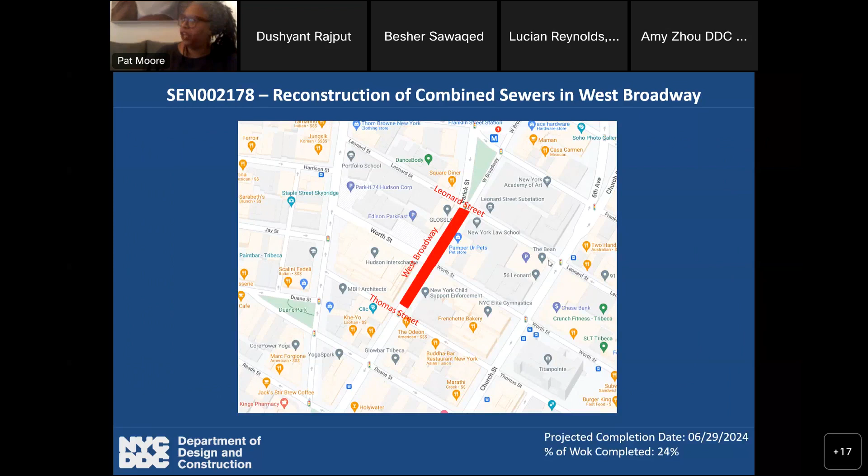So we'll hear from you, it's fine. You can wait till, what is this, February, March, April, you'll be back. So by April, you'll be up and running.

Pat, this is Dushyant, let me give you a little bit of update on the sheeting. I believe it should be approved probably by next week, and once it's approved, the contractor will resume the activities.

Okay, good, okay no problem. And this on the screen is showing the 12-inch water main replacement work we did before the contractor took their holiday vacation back in December. This is for the east side of West Broadway between Worth Street and Leonard Street. They put in a new 12-inch water main.

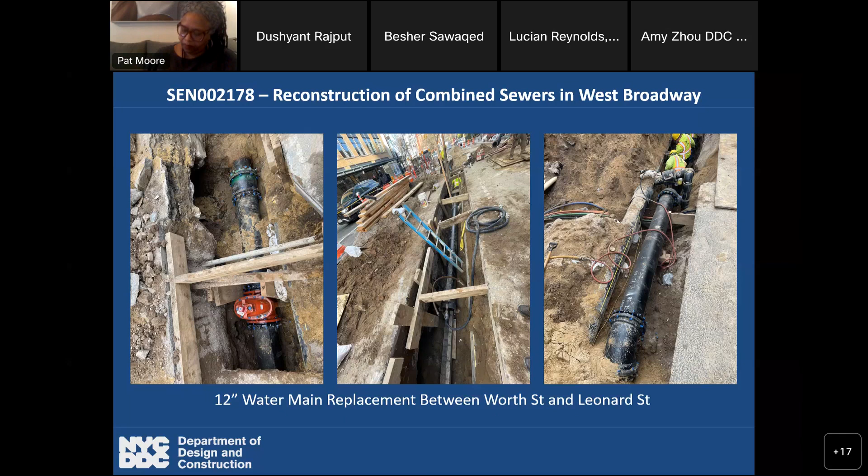It was between Worth and Leonard Street, on the east side of West Broadway. They also installed new fire hydrants between Worth Street and Leonard Street after finishing the water main replacement. This was all done before January.

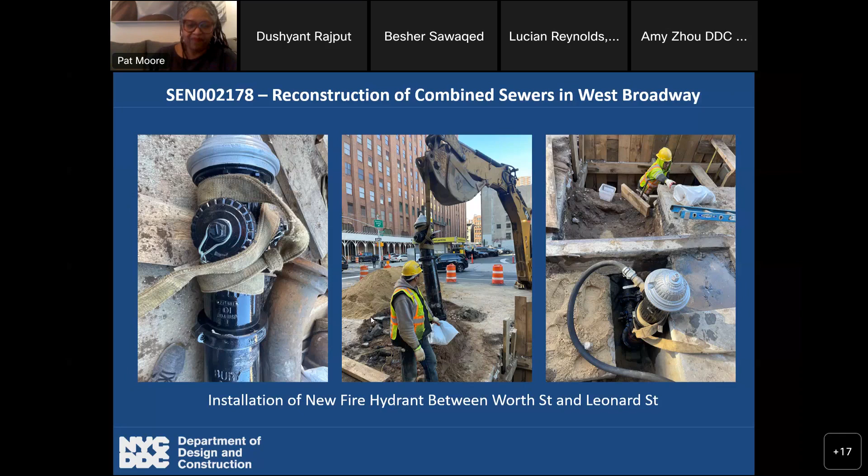So it looks like quite a bit of work got done there. This is a project drawing showing what we still have left to do. After our sheeting design gets approved by MTA, we'll restart the project doing the water main replacement on the west side of West Broadway between Worth Street and Leonard Street. We'll be upgrading the 12-inch water main to a 20-inch, upgrading the 20-inch water main to a 24-inch, and replacing the current 24-inch water main with a new one.

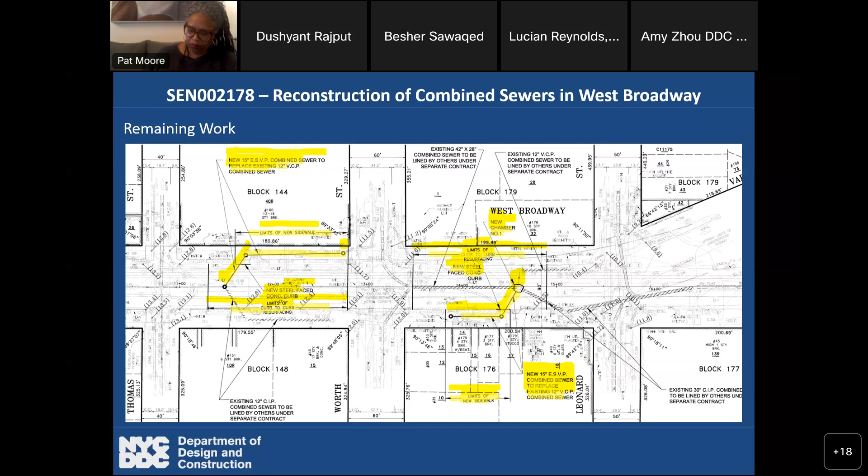That is what we had planned originally, before the stop work order, and I believe that's still the plan going forward. But if anything changes, I'll give everyone an update.

How old are these water mains? I'm not very sure, but I'll find out for you and get back to you guys. I'm just curious. They're quite old, that's how I could say it, but I don't know the exact age of the mains.

That's fine. This is Besher - I'm looking at the slides that we have. The 12-inch water main was from 1870. The two 20-inch water mains were from 1898.

Initially this was a combined sewer project, but when the contractor excavated and we looked at the water mains, they were very old, made of cast iron. Whenever it's cast iron, we have to upgrade it to ductile iron pipe. At least they're not made out of lead.

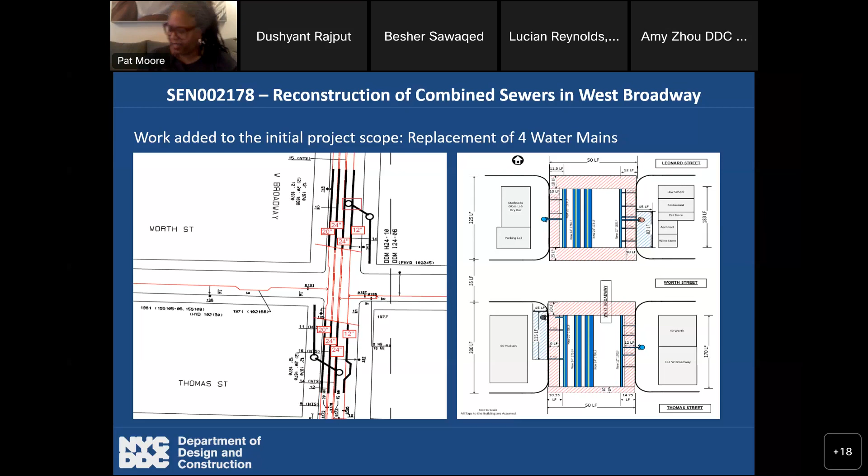Going to the next project, we have the Greenwich Street project. I believe we have Phillip to update us on this. Thank you, Betsy. Good evening, everyone. I'm Phillip Stafford, the liaison for the DDC's Greenwich Street project. We've been at it for over a year now, so I'll try to keep it brief, but it's somewhat of a substantial update.

You can see we're working on Greenwich Street from Barclay Street all the way to Chambers, the highlighted area there. The majority of the work on this job is between Barclay and Murray. We're going to do all the upgrades, all the utility work, and restore that entire area before we even go up towards Chambers. You can see the scope of work here, all these different things we're going to do.

Our sequence, which we've stuck to, is doing all of the sewer work, the water main work, and of course when you're trying to replace the sewer or water main there are many utilities in the way, so all of that work is happening concurrently. Then we can move into the curb, sidewalk, paving, and street furniture.

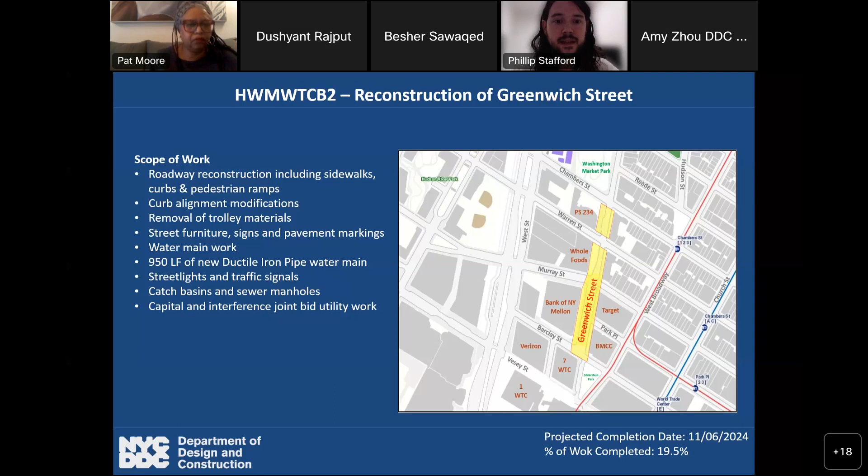Most notably, when we're done, the curb on the west side of Greenwich Street from Barclay to Murray will bump out in 3 sections. So the street will have a lot more sidewalk and less roadway, along with street furniture upgrades as well.

Here are some of the numbers we're at right now. Like I said, we've been here over a year, just a little bit, so about 41% of our time has elapsed. By the money paid out in the contract, we're about 20% done. It's quite the discrepancy, but we still believe we're on time to finish by the original completion date. It's just that the payment always lags behind a little, so it's not totally reflective of the progress we're making.

And your completion date is? I think it's November 6th, '24. Yeah, there it is.

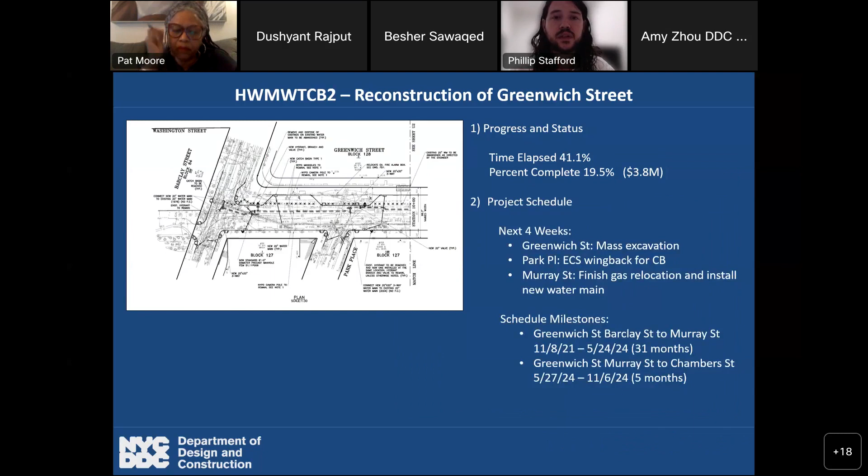So we're moving the gas, Con Ed has to move their ducts so we can install our water main. This is ongoing, but having such a large excavation is really helpful because we don't have to dig as many test pits and we don't have to waste any time really.

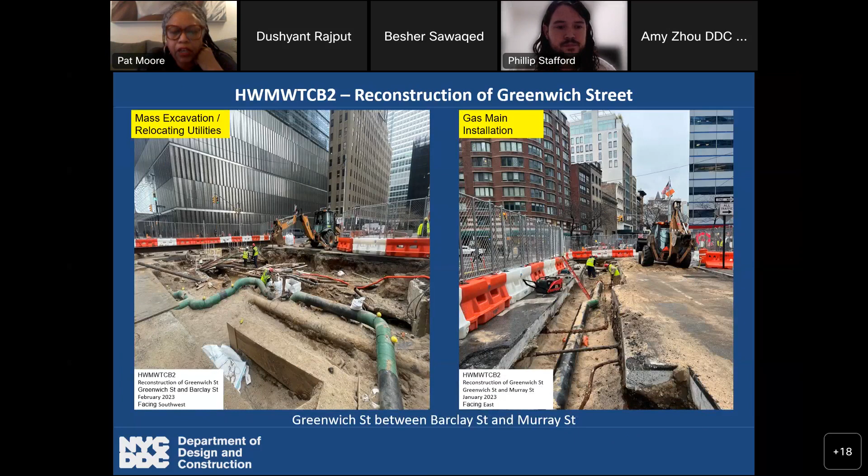Good, great, no complaints I hope. No complaints, it's just turned into more of a constant coordination between us, the bank, and BMCC, but no real issues. Okay, this is the Mellon Bank? Yeah, BNY Mellon right there on the west side.

I'm still in contact with their staff. I'll probably talk to them Friday, but last I heard they didn't have any plans to start their job immediately, maybe this summer, but we'll have a pretty good field meeting before they start anything. Just let us know what's going on so there's no conflict between what they want to do and what you have to get done. Yeah, absolutely, they've been pretty good so far at least. Good, I hope that relationship continues. Yeah, we'll try, thank you.

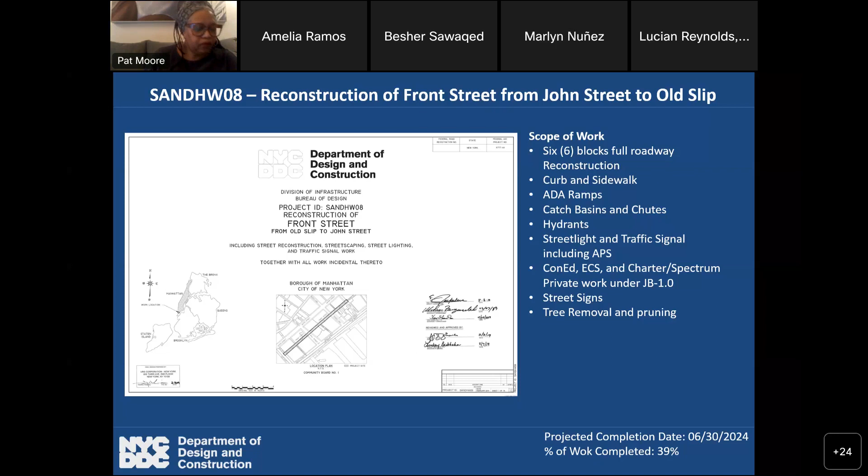Who is next? For our next project, which is Front Street, we have Howie presenting. There's a lot of people here, so people who should be panelists should raise their hand, especially if they're part of the DDC team. Okay, Howie is here, he's on the attendees list. Also Norbert, please, and Laura as well. Okay, there he is. Hi everyone. Is it Howie? Yes. Hi, how are you? Good, how are you? I'm doing okay, thank you.

I'm the resident engineer for the reconstruction of Front Street from John Street to Old Slip. For our scope, we have 6 blocks of roadway reconstruction, curb and sidewalk, ADA ramps, catch basins and chutes, hydrants, street lights and traffic signals. Since this is a joint bid project, we have Con Ed, ECS, and Spectrum as partners.

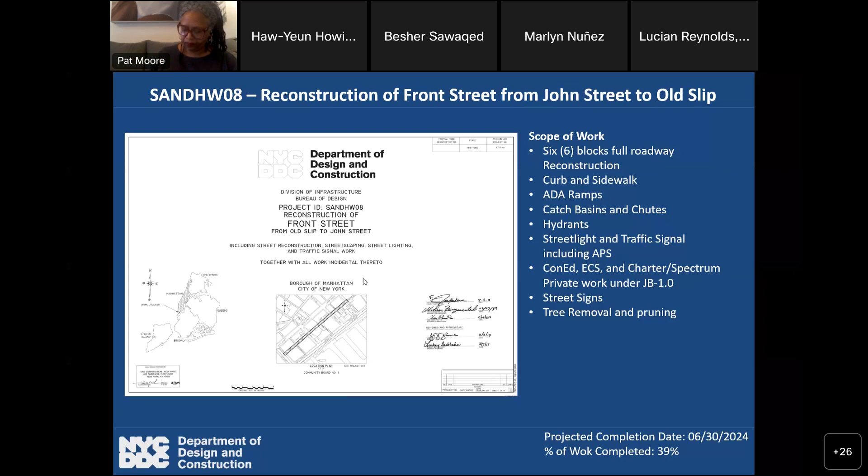We also have street signs and tree removal and pruning. Do you also handle the street tree removal and pruning? Yeah, I believe there were some trees that we're supposed to remove, and that was to be designed. Are they going to be permanently removed or removed while you work and then returned? I believe they'll be replaced. So replacing with new trees, or will the old trees come back again? Oh, new trees, yep. All right, okay.

So, work completed to date: we had 9,600 feet of Con Ed electric conduits and 6 Con Ed manholes.

We also did some steam main work, installation of housing, and asbestos abatement. Also, we relocated an anchor which interfered with one of our catch basins.

So far, we have installed 5 catch basins and 1 manhole and all the chutes, and we also have 2 sewer manholes replaced, which we did because Con Ed damaged the sewer while installing the steam main, probably years ago. But we did replace a section of sewer.

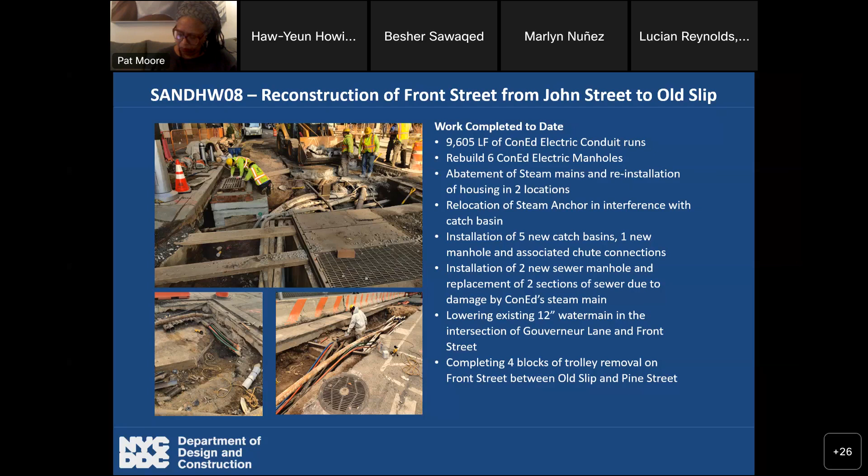So some of this unanticipated work we found was caused by existing infrastructure — some pipes were penetrating the existing sewer, so we're planning to do some repairs.

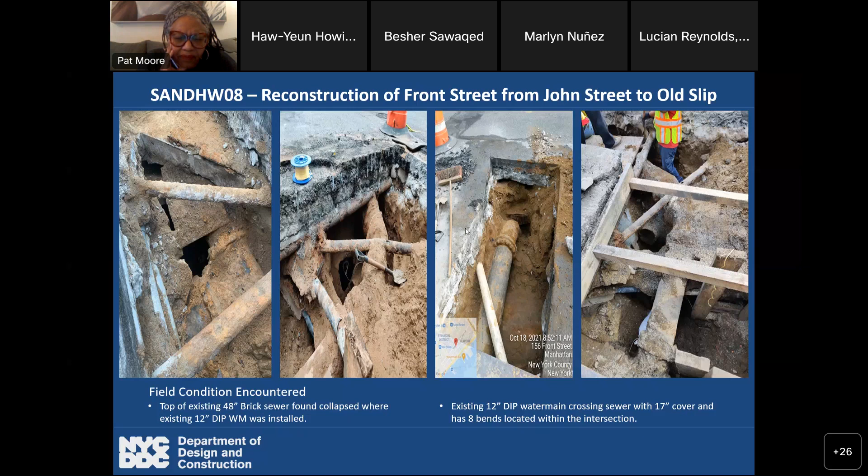This is Maiden Lane. We'll probably also be doing some water main work along with that. These look really old — yes, I believe the old ones were from the 1800s as well. Next slide, please.

So currently we're still on trolley removal. Now we're up to Maiden Lane — right now we're between Maiden Lane and John Street.

We're relocating existing utilities that we find are too shallow for our new roadway. We also installed some catch basins, manholes and chutes between Wall Street and John Street, which we were able to do because we have a second crew.

Just to note, the second crew came from P&T — they were originally on the West Broadway project, which had a stop work order. So I believe when West Broadway starts again, we'll be back to a single crew.

You've also had great weather, so that's helped a lot too. Yeah, definitely the past couple of weeks. So we're doing a lot of work right now, but we could slow back down again.

Yeah, exactly. At the very bottom: full roadway reconstruction for 6 blocks, 1 block of cobblestone. Don't forget how we feel about cobblestones — yes, they will go back. We'd like them to go back so that they last for 100 years. That's what we're trying to work towards.

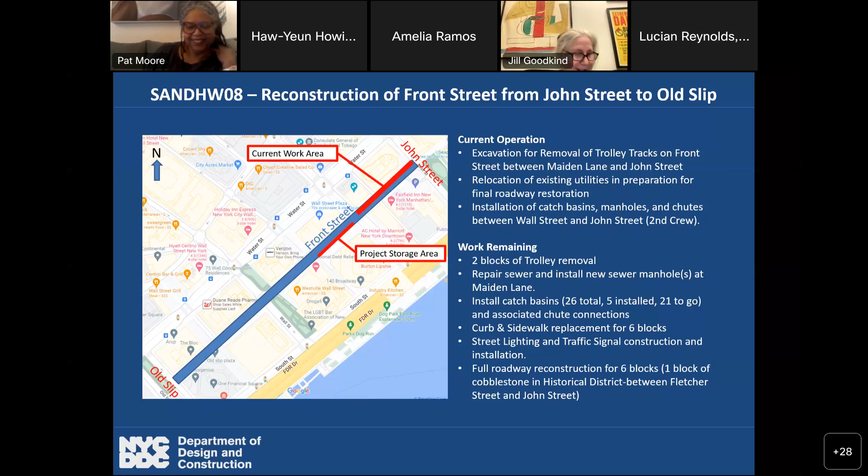Well, it's kind of scary this weather, but let's hope it holds out so that you can get these projects completed. Thank you, Howie. No problem. So now who is next?

So it will be me again, Besher. We'll talk about the reconstruction of Vesey Street between Church Street and Broadway. The projected completion date is September 17, 2024.

So we start, the contractor mobilized... I'm sorry, just tell me the completion date again. September 17, 2024. Okay, thank you.

The contractor mobilized to the site on October 17. Percentage of work completed is about 19% so far. So technically, we are making a lot of progress on Vesey Street.

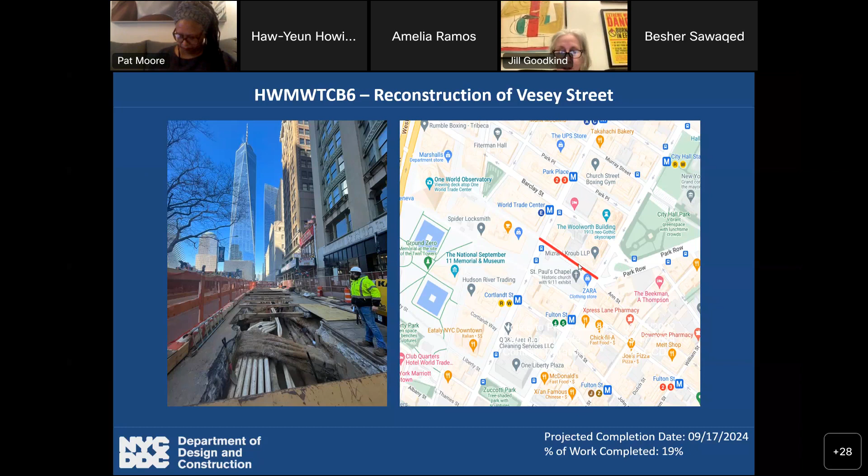The scope of work is mainly installation of catch basins, installation of sewer cleanup manholes. We also want to upgrade the water main from 12-inch to 20-inch. In addition to private utility upgrades, we'll also be doing some work for the street lights, the traffic signals, installing the sidewalk, 6-inch granite curb, and upgrading the pedestrian ramps at the Church Street and Vesey Street intersection.

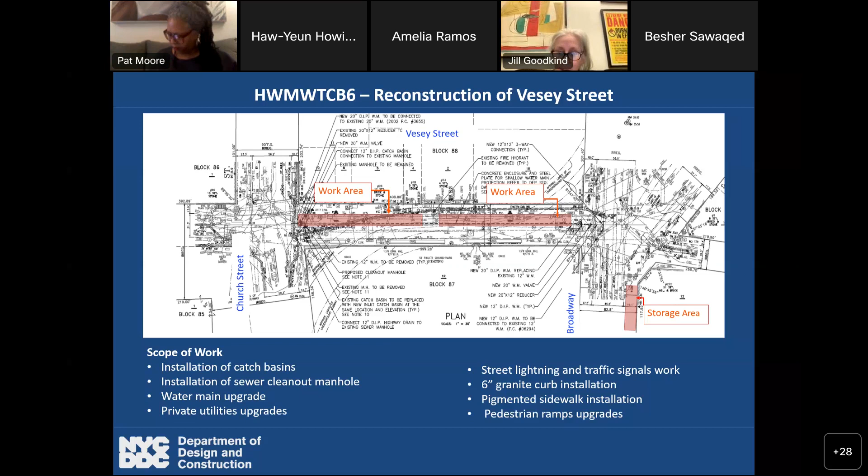What are the private utilities? I have some pictures in the next slides. We're talking about electrical conduits, ECS, Verizon, Spectrum. We have oil lines for Con Edison. We have the gas main in yellow right here.

And the challenges that we have been facing on Vesey Street is we are dealing with the aftermath of 9/11, where all the private utilities had to relocate all the new lines to feed the area. We also find a lot of abandoned private utility conduits that are dead, that are empty, so we take those away to make more room for the 20-inch water main.

I'm just curious, so if they're private utilities and you guys are city, do the private utilities pay for this? Of course. Okay, yeah, so this is a joint bid project under the joint bid 1.0 agreement.

Actually, we have Con Edison funding 49% of the project. We have ECS funding 17% of the project, and the rest is funded by the federal government and the city of New York. Because again, this area of Vesey Street, during the cleanup after 9/11, all the trucks had to take Vesey Street to remove all the debris.

Right, okay, I was just curious. That's good to know that they're kicking in some money. Yes. Good, good, all right.

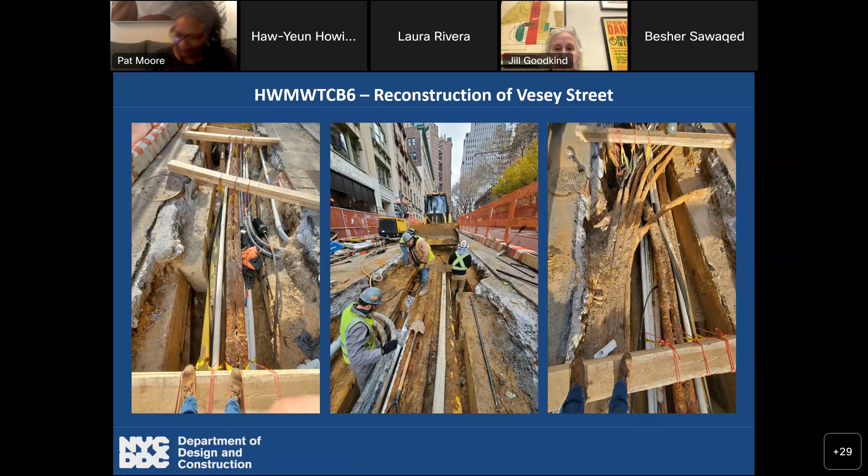All right, so who's next? Right now we will be with Norbert, our RE on Nassau Street. Good evening, everybody, my name is Norbert Kluz. I'm introducing the Nassau Street reconstruction. This is a project that's right around the corner. It has not started yet, but the contractor is slated to start late March.

Probably starting test pits the week of March 20th, based on their initial schedule. The scope of the project is Nassau Street between Pine Street and Maiden Lane. The scope of work is 3 blocks of full roadway reconstruction, including granite curbs, sidewalks, upgrading ADA ramps, installation of catch basins and drainage, a new wayfinding sign, and restoration with a 9-inch concrete road base with 3-inch asphalt top. There will also be a new bump out on the east side of Nassau Street and Cedar Street to accommodate those ADA ramps, and upgrades to street lighting.

I'm sorry, what are ADA ramps? It's the American Disability Act. Basically, we make sure all the ramps are handicap accessible and upgrade them, so wheelchairs and anybody with a stroller can get up onto the sidewalk without any issues. So it's like the curb cut? It's basically the angle. Yes, at the corners, the ramps that have the detectable warning surfaces, also for the blind. Oh, okay, right, so you have the black with the circles. Yes, it depends also if it's federally funded, then we have the white, and sometimes they're red. So we're upgrading all those to make sure we have the right grades and are compliant.

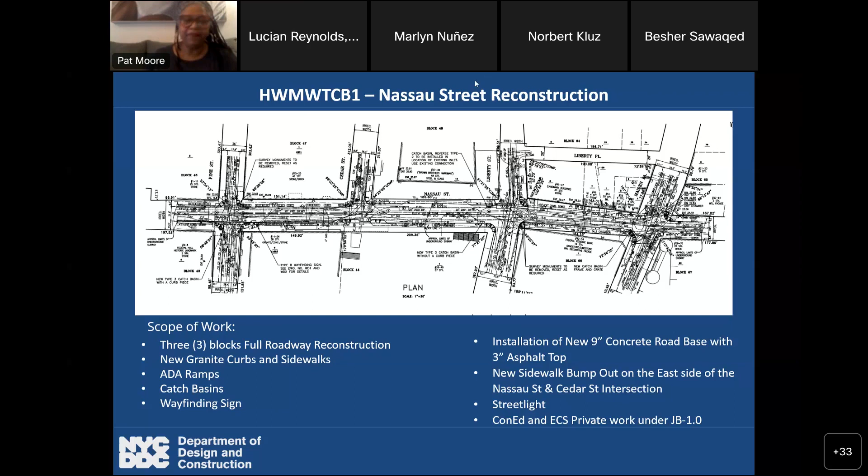So who's next? We're done. That was really quick. Wow, thank you. Done with phase 1 of DDC. Yeah, but that's great.

Any questions from the committee? Nope. All right, so any other geeky thing that you think we might like, just send us some pictures. We love to see anything that might be historical. Like, I love to know that these water mains are from 1870. Sonia used to send me pictures of the trolley tracks they're pulling out of Vestry. I'm so glad to know I'm not the only one.

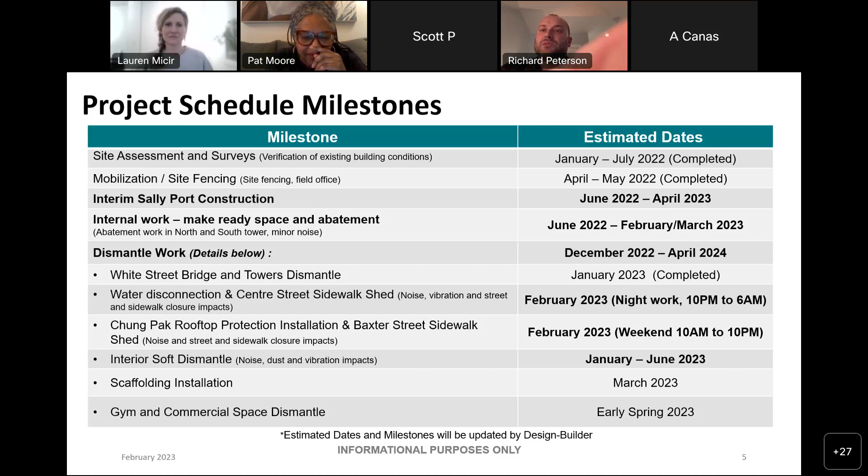Chung Pak rooftop protection and the Baxter Street sidewalk shed will be going on weekends from 10 a.m. to 10 p.m. Scaffolding installation will begin in March of this year, and the gym and commercial space dismantlement along Baxter will begin in early spring.

I'm going to walk everybody through the initial video representation of the project. While this was created some time ago, it still is extremely close to the intended plan, and I know some of you may or may not have seen it.

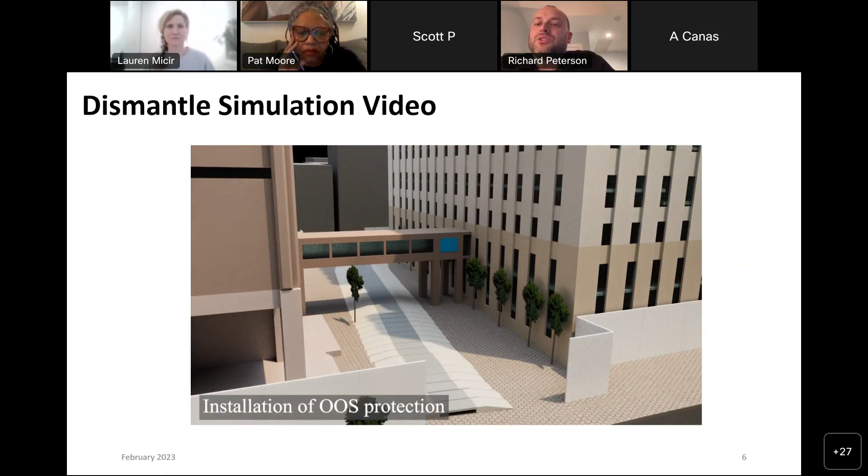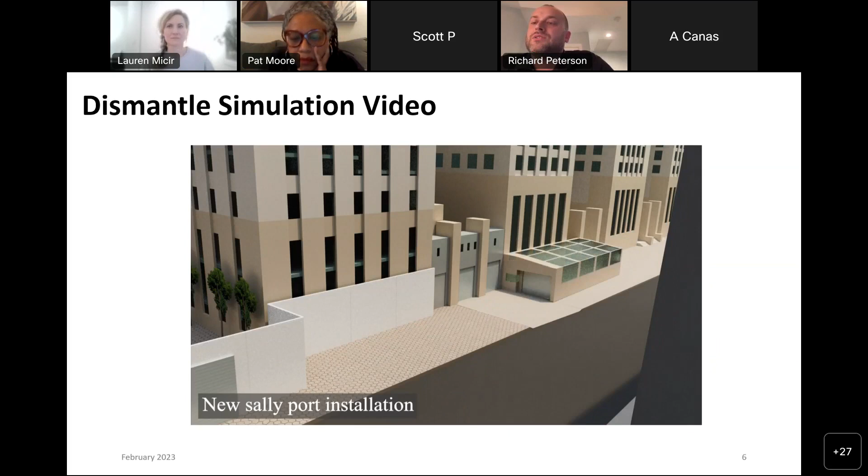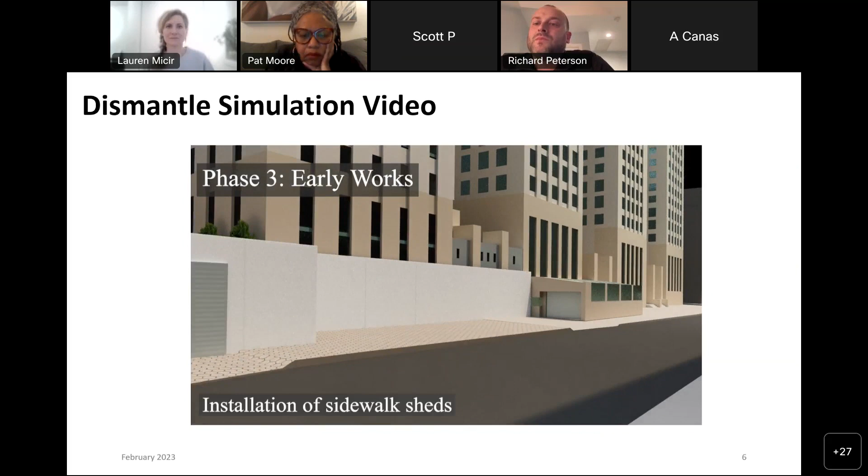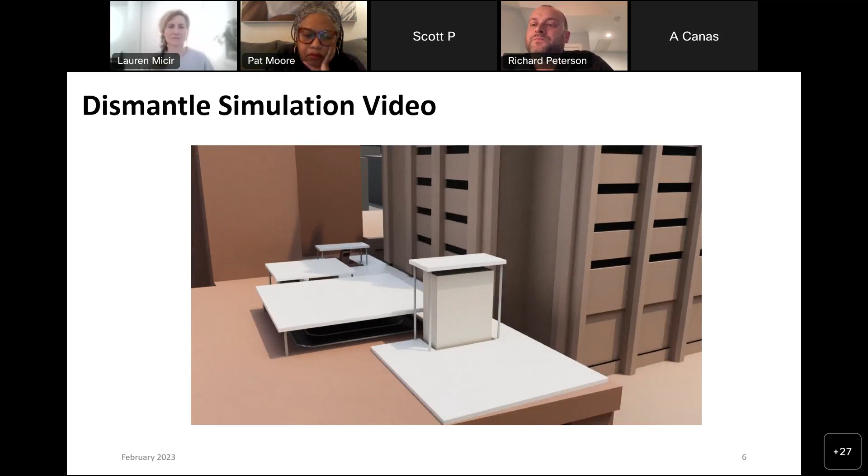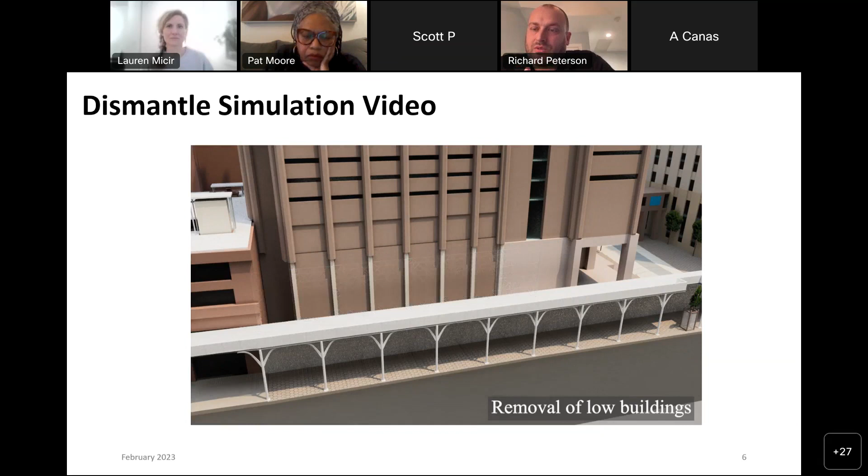Once that's completed, the sidewalk shed will be erected along Centre Street, which is currently being erected at this time, as well as the roof protection over the Chung Pak building. Scaffolding will then be installed on the Centre Street side. The exact sequencing of that going first versus later is currently being changed—that section might come down later.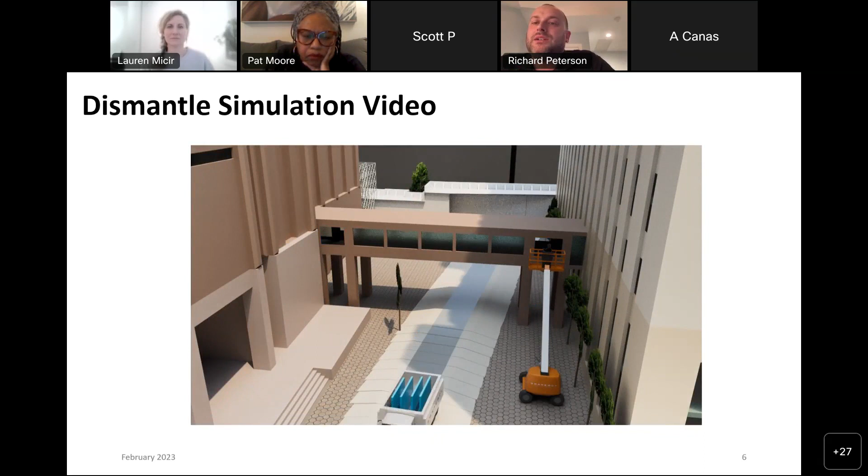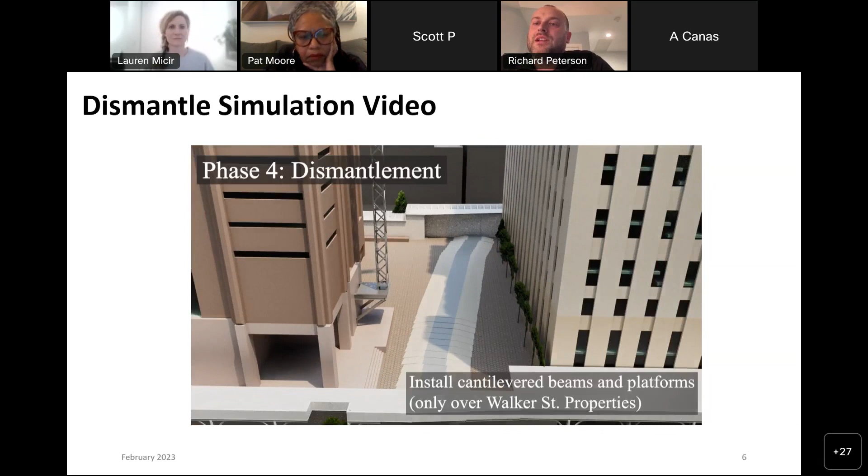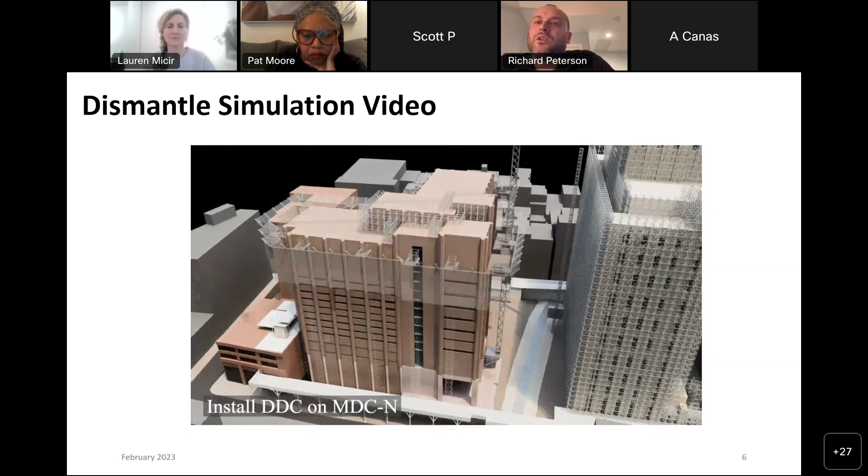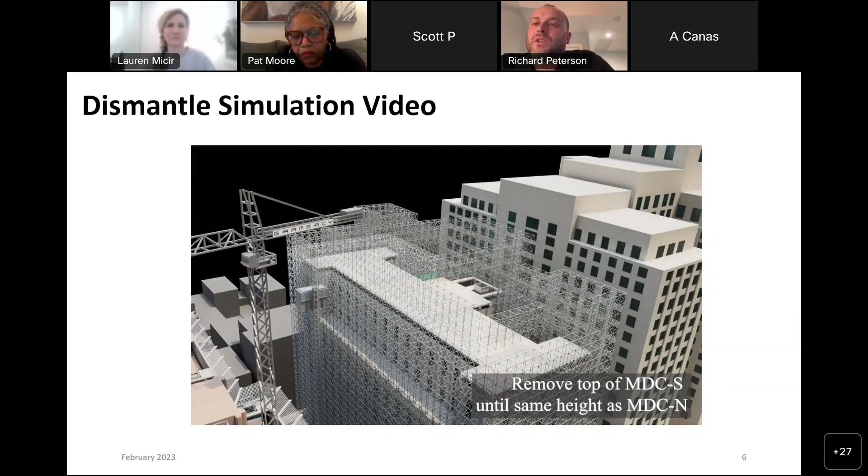The White Street Bridge had the artwork salvaged and has been dismantled; that is currently completed. At that point, cranes and scaffolding will be installed on the towers, which is getting ready to begin. The buildings will then be demolished floor by floor, level by level, bay by bay, working from top down. You will see two different types of scaffolding on this project, both represented here in this video. As each floor is completed, the scaffolding will be removed down to the next level, and so on through the different phases of the building.

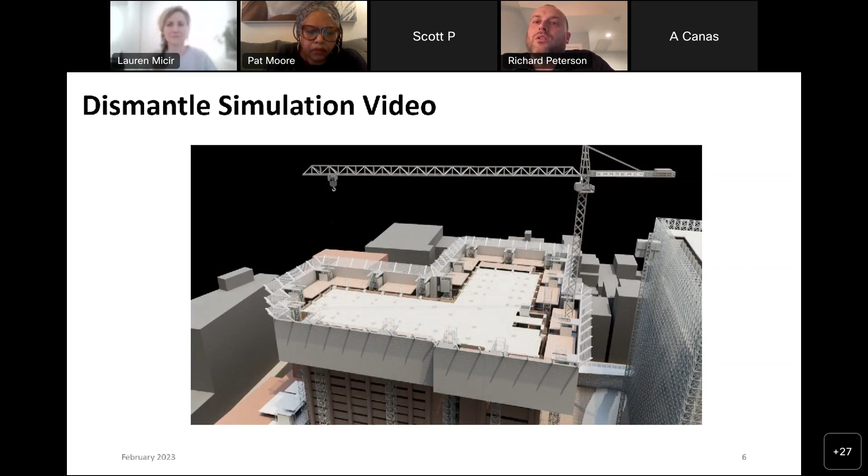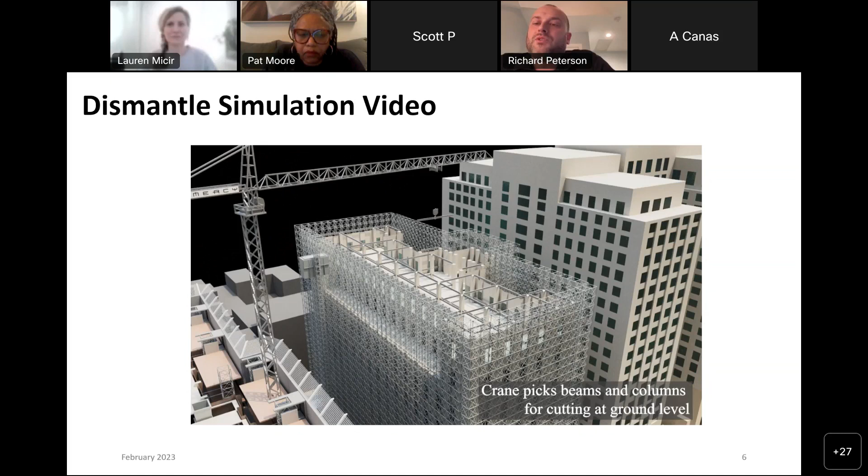You will see the crane picking and lowering things off of the roof, whether it be pieces of equipment, interior building components such as columns and beams, or the exterior panels of the facade of the North Tower. On the South Tower, you'll see bundles of steel being removed, as well as small dumpsters of material being lifted and lowered down to the ground.

As it progresses, the bridges between the courthouse and the South Tower will be dismantled once the demolition reaches that level.

Once we get below the Chung Pak roof, protection will be removed, and the site will be cleared of all foundation elements not supporting exterior perimeter walls of the site, with proper shoring and bracing installed.

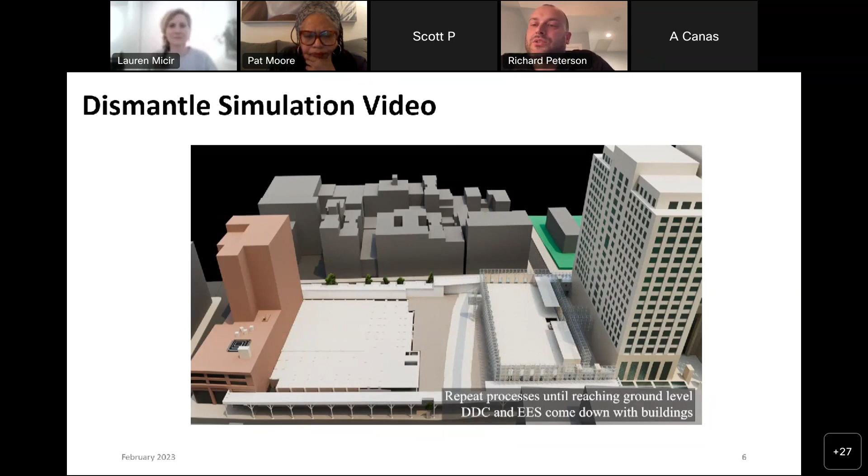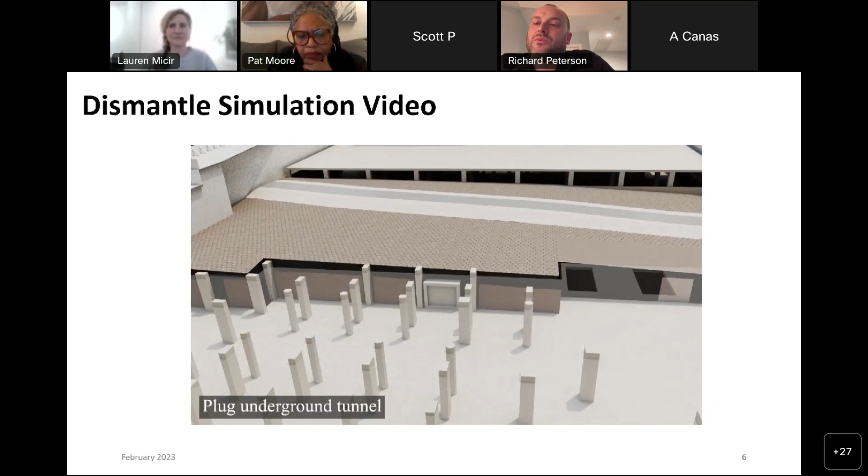There is a tunnel that currently exists between the two towers underneath White Street that will be sealed up, closed, and abandoned in place. The basement of the courthouse will be covered and protected with a bracing system in order to avoid any loads of the backfill being imposed against the courthouse.

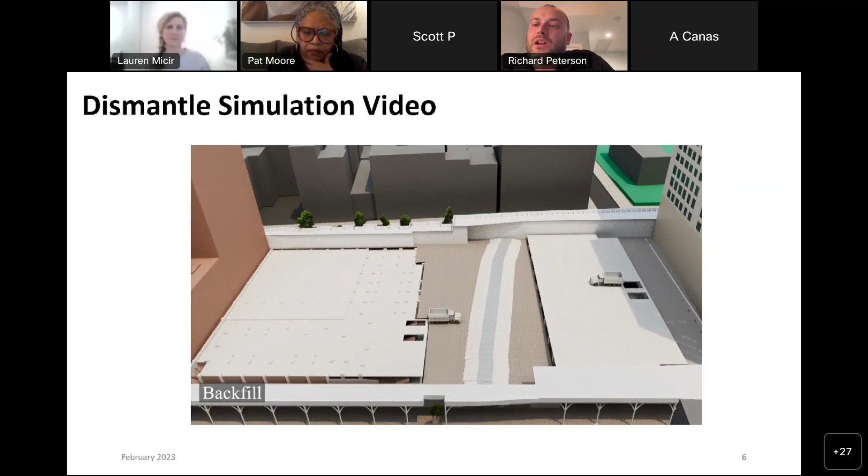At that point, the last of the slabs will be removed. The site will be backfilled and left for the next phase of construction.

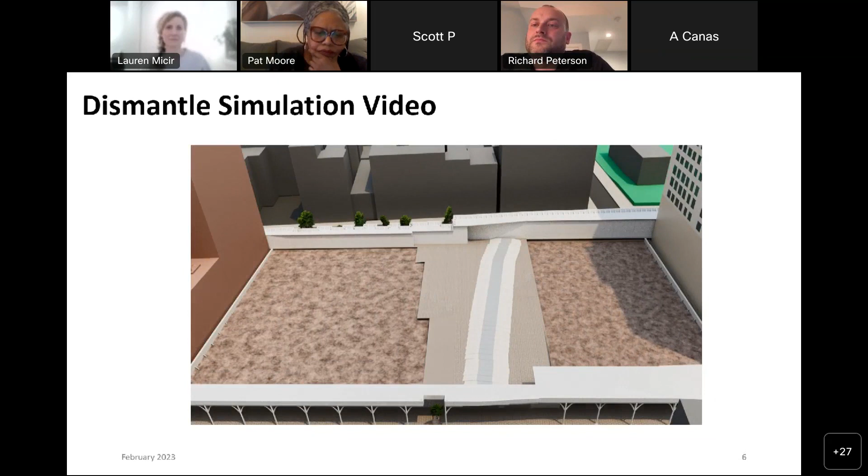This is the current layout of the site. If any of you have walked by, everything you see here in red is the existing construction fencing around the North Tower and parts of the South Tower. The yellow around the Sallyport is the Sallyport barriers, and the fencing around that is also indicated. What you see in blue hatching is the current sidewalk shed being installed along Centre and the northern end of Baxter.

A new crosswalk was installed at the south end of Baxter at Bayard due to the sidewalk closure on the west side of Baxter Street.

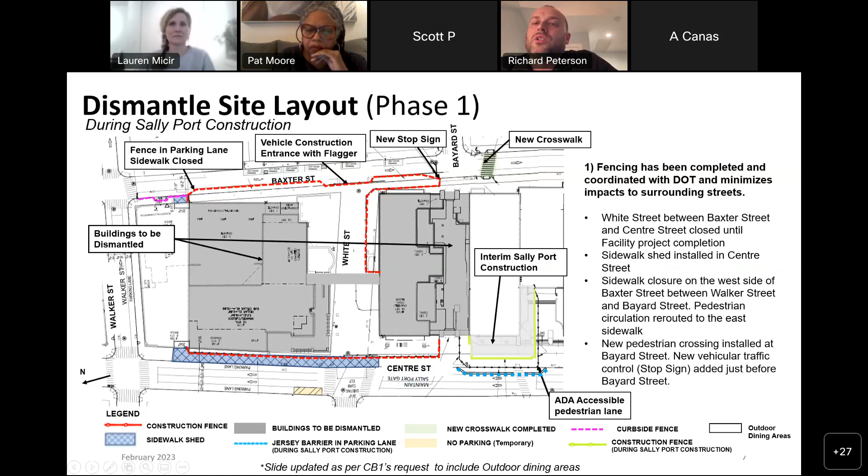Once the Sallyport is completed, the South Tower will be enclosed in sidewalk sheds as the North Tower currently is, and the sidewalk shed will be extended down to the face of the new Sallyport, in front of the existing Sallyport.

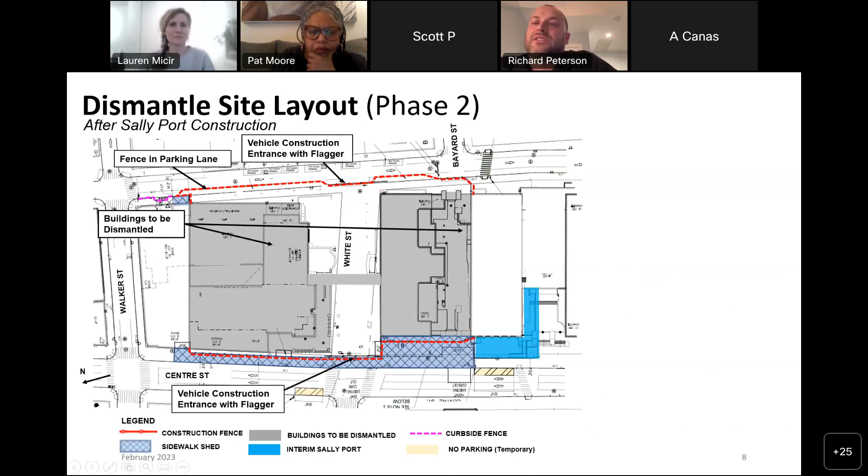These are some updated progress photos. On the left is the current status of the interim Sallyport. In the center is the current construction of the sidewalk shed on Centre Street. And on the right is where the White Street Bridge had once been, now removed from the White Street area.

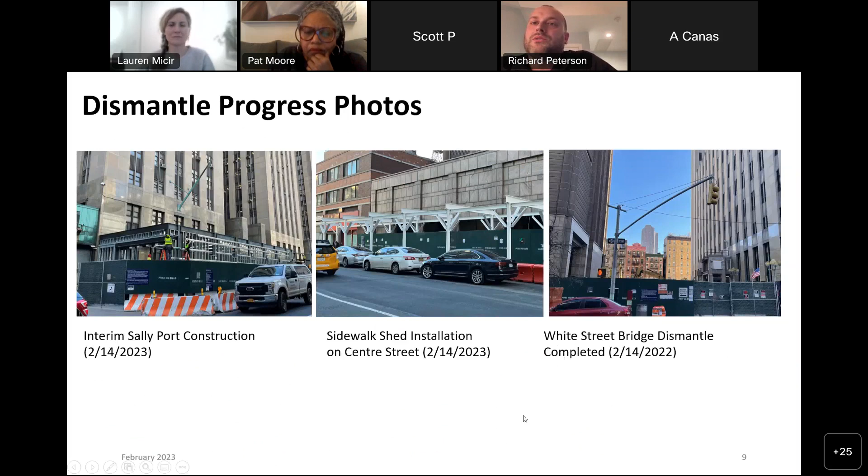Regarding rodent and pest control, we have continued to monitor these stations that you see here in magenta. We check them, rebait them, and make sure nothing is noticed. We've been keeping track of it and haven't had any issues so far. If anyone sees anything, please alert the CCL so we can take care of it.

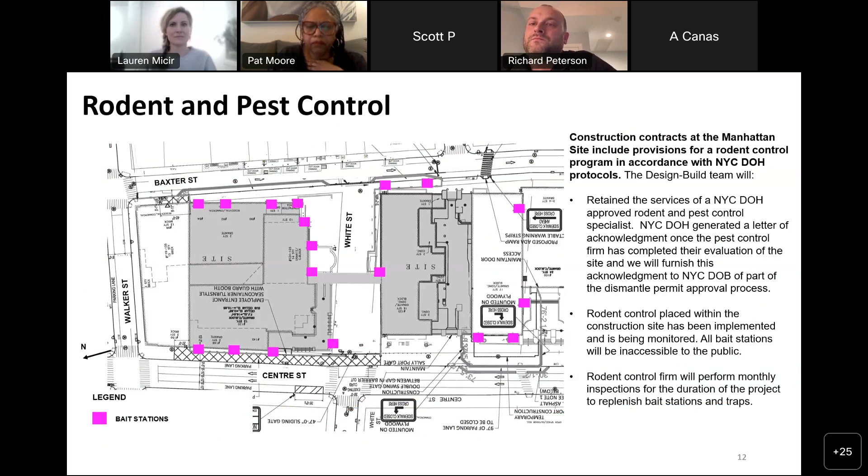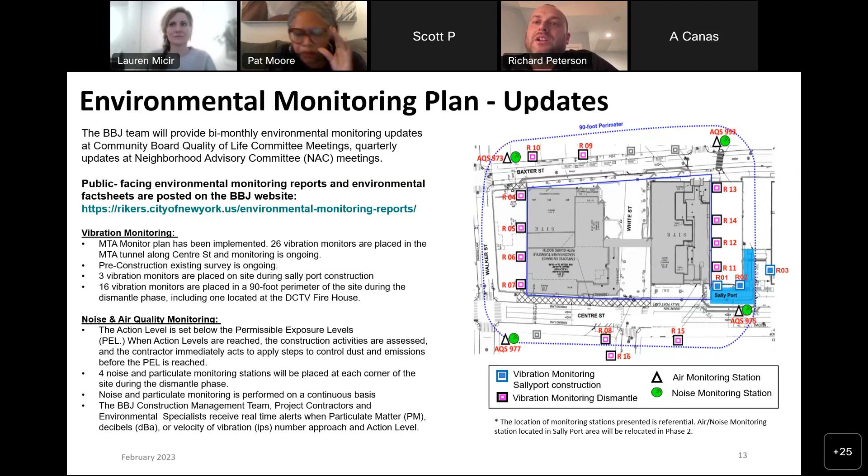Environmental monitoring: as you can see here, we have air, vibration, and sound monitors around the perimeter of the job site. To date, we have not had any exceedances on any of the monitors. Everything has been below the allowable limits.

Asbestos air monitoring has been going on inside the job site, outside of the immediate containment areas, checking for negative air and confirming that no asbestos particles have left the job site where that containment barrier is located. To date, we have not had that occur.

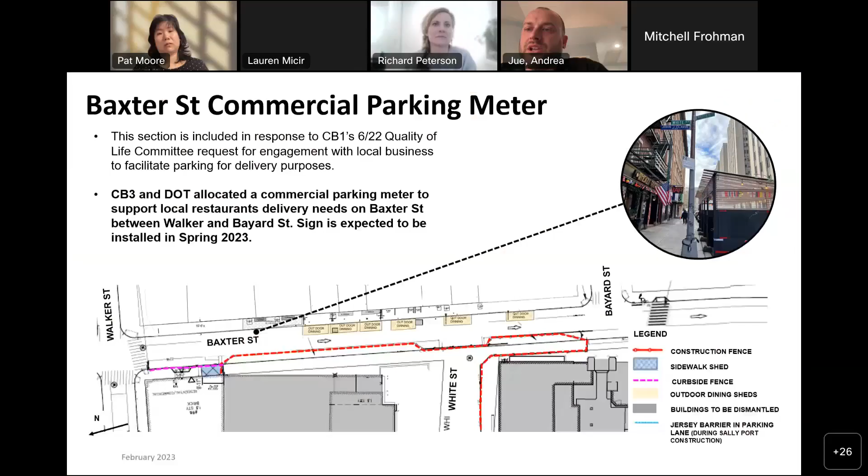Hang on, is it every night? Yes, every night this week and going into next week. So it requires that much time to construct this shed on Centre Street.

Do you do the noisiest work at 10 and the quieter work later? It's all continuous work, but it is not extremely noisy work. It's picking these steel beams that you see in this photo and bolting them together.

I have to say, I don't believe we have been too incredibly noisy. We have been extremely mindful of it and doing the best we can to keep it to a minimum. Okay, so would you let us know if it's going to go past mid next week? Would you somehow let the community know that?

Yeah, the advisories go out. I believe Nikita keeps them updated. If we put out one advisory and the information on it then changes, you will see it's advisory through here. You can see it's through February 22nd, which is Wednesday. So that community advisory has been out.

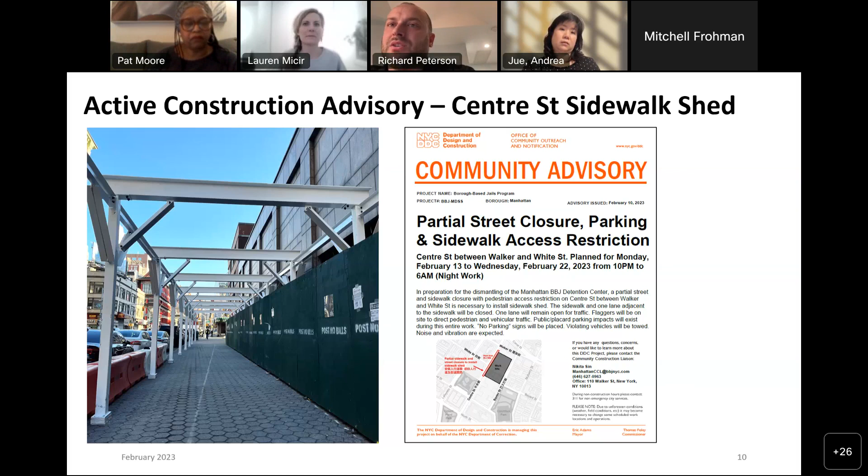So at the same time, since you're extending into next week with the sidewalk shed, you're going to start doing this disconnect work for the main water main on Centre Street, right? Do you have that advisory, Lauren? Can you pull that up?

It's on the one with the 3 sheets across right here. But the reason that has to be done is because it's in the middle of Centre Street, right? And so you would have to stop traffic to do that, correct? That is correct. Okay, and how long do you anticipate it will take to disconnect the water main?

The hope is to get that done in one shift. Oh, just so one night?

We have it scheduled right now, but we put out the advisory for Monday of next week through Thursday, because I think we try to put out the information with as much specificity as we can, but there is uncertainty with construction.

It's not like I know when I open the street exactly what I'm going to find. You hope you're gonna get it done in one shift, but you find out it's different than you expected. There's a utility in your way that was unknown, and sometimes things go on 2 or 3 days that you didn't anticipate. So you do the best you can. Obviously the quicker and the quieter, the better it is for everybody. It's not good for me to drag it out multiple days either. So we do the best we can to get it done as quickly as we can.

Okay, so just explain to us, Rich, why this water main pipe has to be shut off so that people understand what's going on. That water feeds the North Tower, and if you leave it on, at some point it will freeze, it will break, and you will have flooding. It needs to be disconnected as part of the dismantlement.

Okay, so I have a question. So you're cutting off the water—essentially there'll be no water on the site. Is that what you're saying? No, this is the water that powers the building. It's what used to be used.

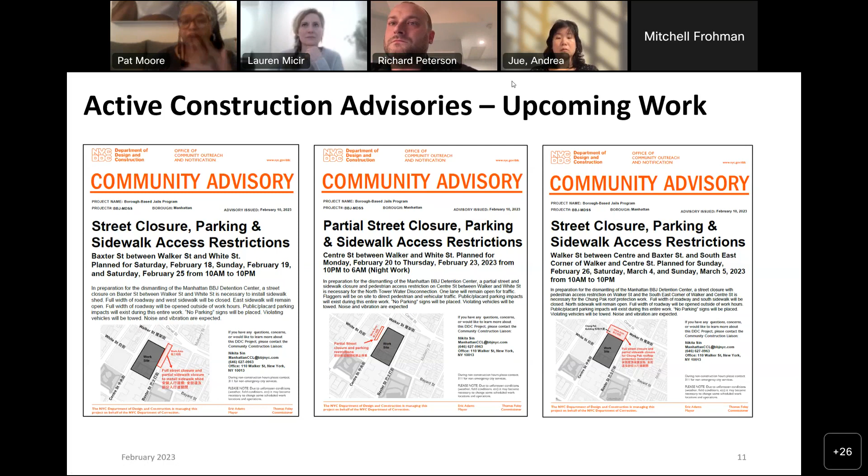Andrea, does that help at all to actually have some information and understand what they're specifically doing? Yeah, because those advisories they sent out are very vague, you know, ongoing dismantle work, blah blah blah. Okay, that's why we try to have them come every other month so you can get very detailed, specific information. And Rich and Lauren will send out advisories if things look like they're going to change.

And one quick last question: when has the permit for demolition been issued, or when is it expected to be issued? The full dismantle demolition permit has not yet been issued. And is there an expected timeline or process?

I'm striving every day to achieve that. There are many facets of it. The sidewalk shed has to be installed—that's one of the things I have to finish before they will issue a permit. So there's many things like that take place. But come early spring, we hope to have completed all of those tasks.

Okay, so you'll be back month after next and you'll update us on that. Okay, Andrea, good? Not good, but at least you've got answers. All right, Diane, I see you, but Justine, you're next.

Thanks so much, I appreciate it, Pat, and thank you all for this presentation. I really just am jumping in because it seems like Karen and Andrea said everything that I was going to say and raised the concerns, which were really important because they're actually living there. But what I would like to say, because I'm not going to repeat what's been said already, is that I think we need to have in this committee a meeting focused specifically on the issues that Karen...